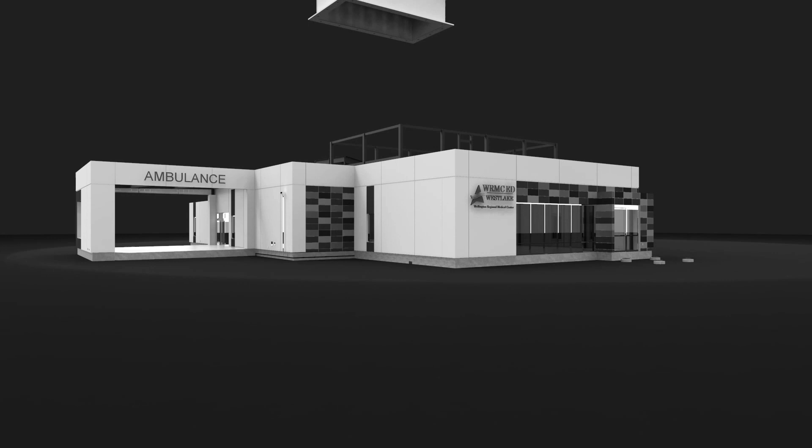In 2000, Honda Motor Company came and said, Chris, we would like for you to lead the design and construction of a really big project in Alabama. It was important for our state. And they said the first phase of the project was a training facility, and it needed to be open one year before the big factory was open.

So we had our first meeting. It was a kickoff meeting. There was no official program, no equipment list. There was really not much more than the Japanese leadership saying, we want a world-class facility to train 4,000 workers in 200-person shifts, and we want it 9 months from yesterday. And we, of course, because that was the type of people we are, said yeah, that sounds like a great amount of fun. We will take that on, and we did.

Fast forward to our second meeting, and we learned three things about the Japanese and their leadership style. Number one, they offered all of Honda's resources to help us help them be successful. It's really important—I don't think we would have gotten there without that notion. The second thing that revealed to us was that I think this was not the first time they had asked their trade partners to solve a really hard problem. And the third one, which was the most important, was there was not a chance in the world that they weren't going to open this thing 9 months from last week.

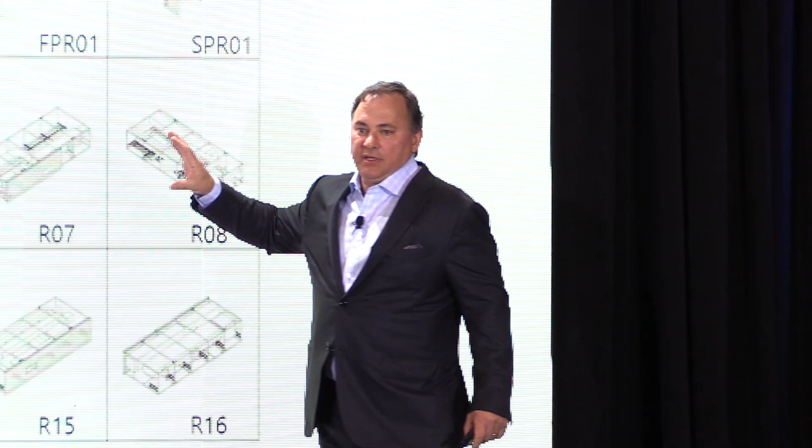This is exciting for me. I believe that if they ever write this story, this picture—Innovation Memorandum 21, which Greg Stein published around 2014—is the one where he said, these are our parts. We work in 38 states, we have several hundred hospitals, but these are our standard parts.

Our standard bathrooms, BPR01, now has a model number—it's a SKU. There's a head wall for med-surg, an overhead ceiling rack, surgical racks. There's a series of standard parts that defined their standards, not as a design standard, but as an intelligent standard, a manufacturable SKU that could begin to change the supply chain systemically.

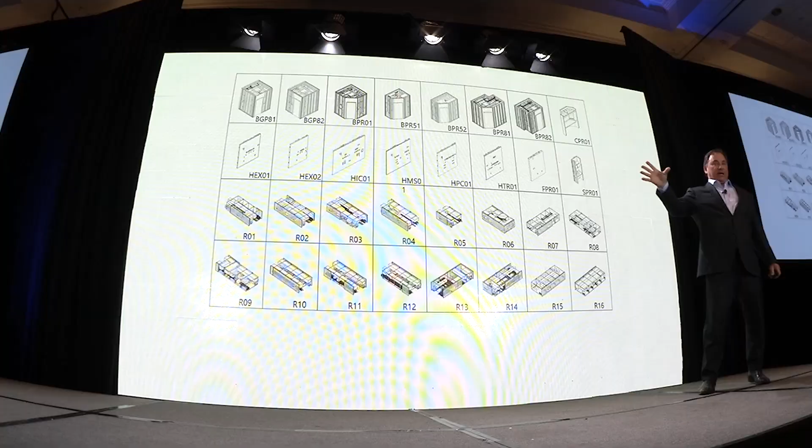So these pieces are really interesting, and interchangeable parts become the ability to make a programmatic level decision instead of a project level decision. And these pieces are installed routinely from Miami to Las Vegas.

Cost is always interesting. So we benchmark the standard stick-built version of these pieces—we kind of know what that costs. Some of this is redacted. And we look at design, manufacture, construct: what are these parts, these standard interchangeable parts, in the beginning? Unfortunately, there was a premium.

So most of you owners in the room right now, your eyes roll back in your head and you go, I knew it, it wasn't going to work. And you're right, if you stop at the wrong point. But if you have the stomach that HCA had, you push through it, knowing there's a promise at another spot.

This promise happens really rapidly at scale. Once you amortize the fixed cost of a plant, of the engineering associated with the tooling, the cost becomes incremental, not linear. The red represents the potential gain. But remember, we only took 25% out. So the problem is there's not enough stuff in the red and way too much in the black, and we have to think about design, manufacture, construct version 2 to get more from the black into the red.

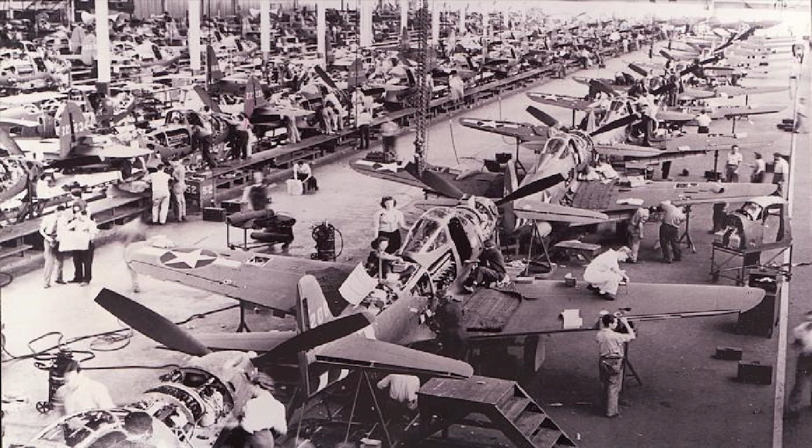And so we can learn something. What we learned when we do this is that the way we were making the parts in version 1 was a lot like the way they made the P-39 Airacobra—piece by piece. And what we wanted to do is rethink that into something Boeing adopted in the 21st century to make the 787.

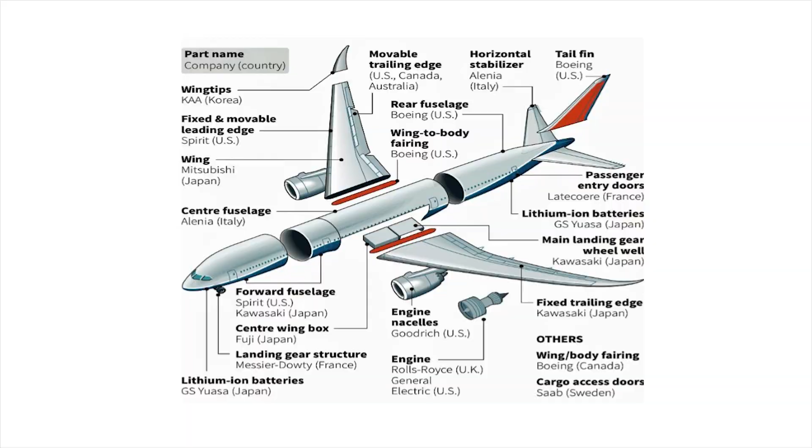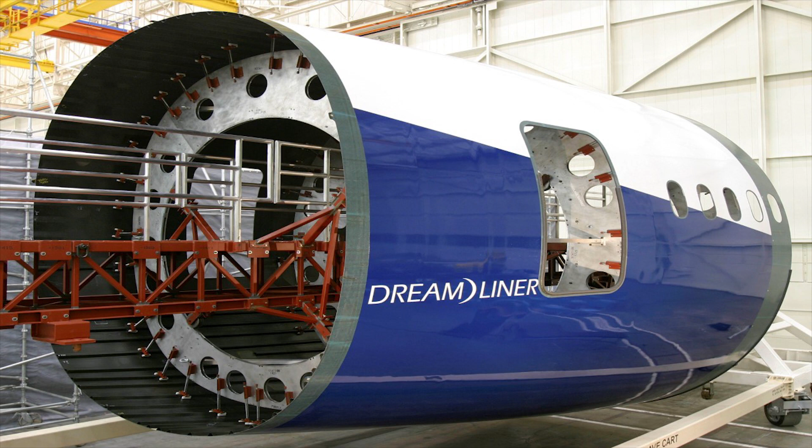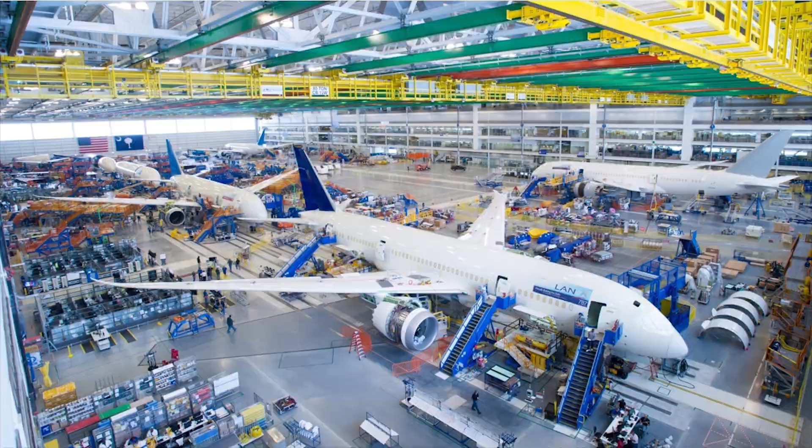Our chunk is called an Uber, and an Uber is not to be confused with ride sharing. It is the largest DOT transport—15 feet wide, 15 feet tall, nominally 60 feet long. It's a red iron structural steel piece that can be stacked 30 stories high.

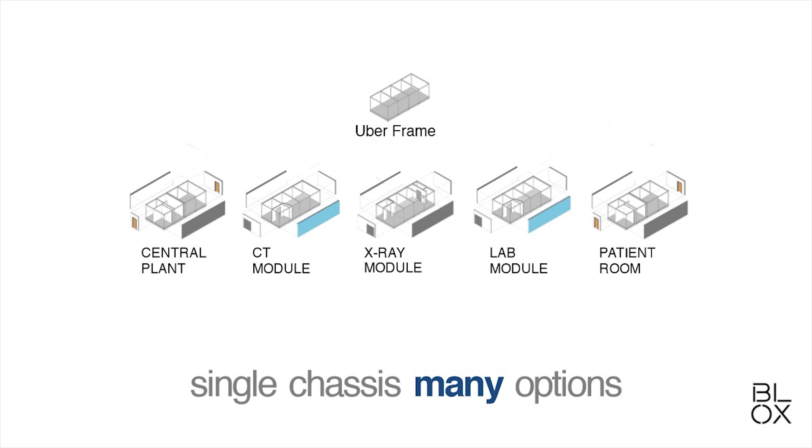In that universal frame is a lot of complexity. We can put a central energy plant in it. We can put a CT. We can put a lab. We can put X-ray. We can put a patient room. We can put a dietary in it. We can put any number of things, and we're adding things all the time.

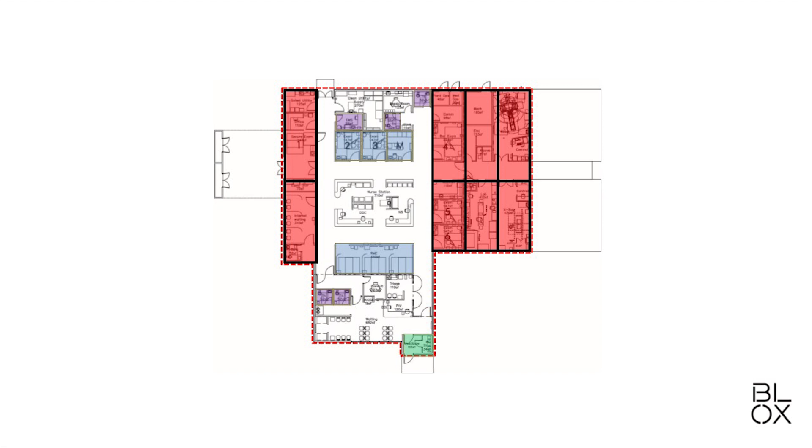This is the freestanding ED that we started with. It has eight Ubers. The red represents those big modules. The space in between represents smaller modules that sit in place. The red also represents the exterior cladding that we add to it.

So here's the way that works. We go to the job site, we pour the foundation—it's a stem wall. We add the Uber modules, which represents about 50% of the overall complexity of that building. We add the flat pack steel. We put the exterior siding on. By week 6, we're dried in and conditioned.

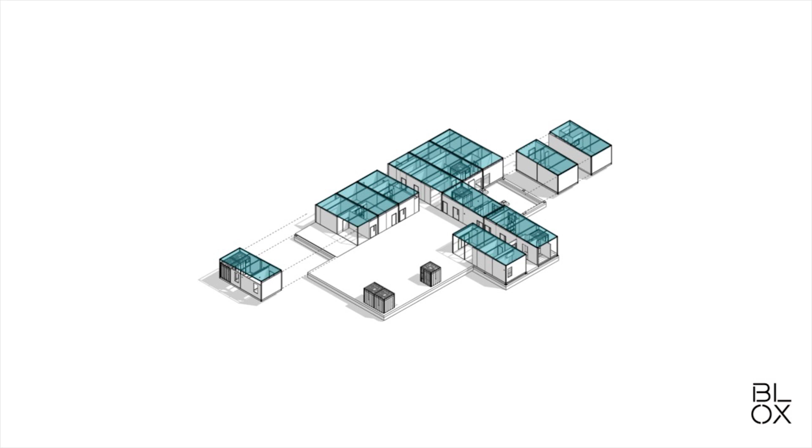When this happens, we will have solved the Gordian knot—or unraveled the Gordian knot—of higher quality at a faster rate at the same or lower cost. The next thing is design manufacture version 3, which is the real holy grail of what we're working on. It is how do we deal with acute care at a significant level.

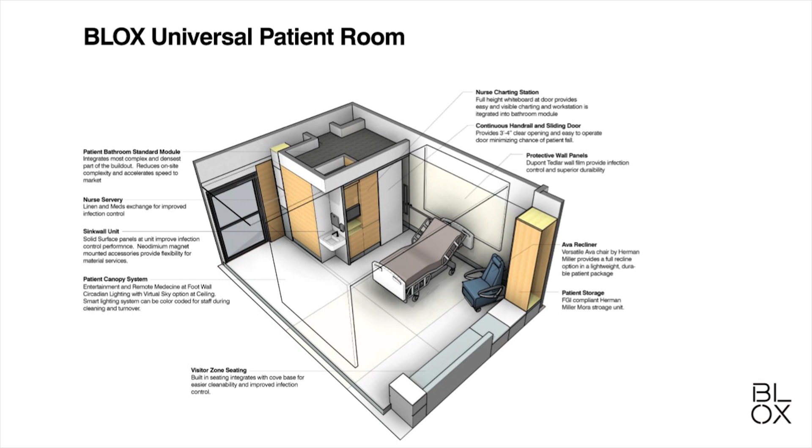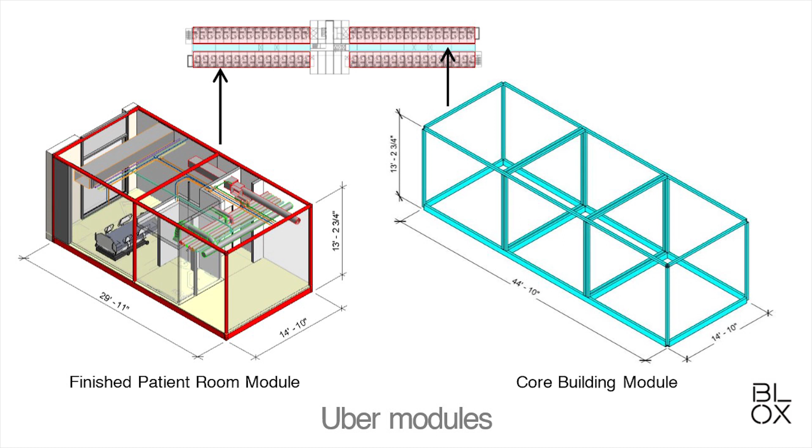This represents a patient room, a universal patient room. It has a lot of complexity in it. Each one of those parts is going to ultimately be best-in-class materials. It becomes the iPhone of patient care. It works in an Uber module, and the Uber module can stack 30 stories high. It can be a way that we will very quickly expand the breadth and depth of what we're doing in healthcare to achieve, hopefully, twice the quality at twice the speed at half the cost.